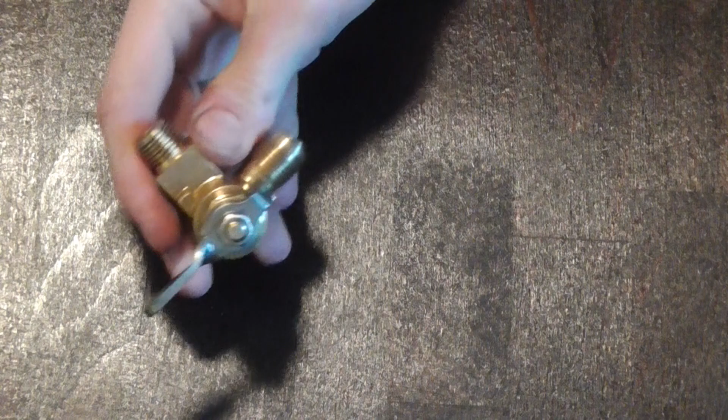The fuel shutoff valve on this thing is leaking again. Here, come inside, I'll show you the problem. So, this is what the gas shutoff valve on the Ford Model A looks like. It's a straight 90-degree on or off type of deal. And let me show you how it looks inside.

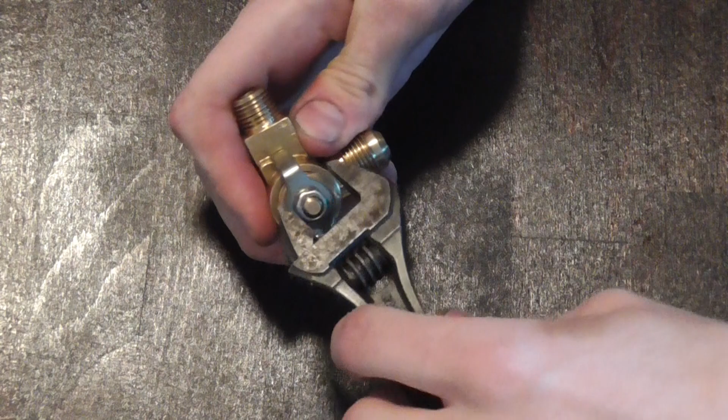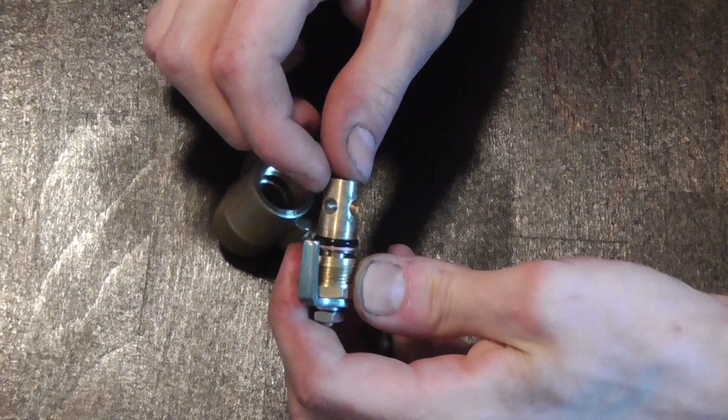Then you can see that there is a tapered plug in this housing, and it has two holes drilled into it at a 90-degree angle. Now when the valve is switched off, like this, then there is nowhere for the gasoline to go because there is no hole in the top, and therefore it seals off. Switch it on, and the hole right here diverts the gasoline over to this hole right here, and therefore permits it to go to the engine, to the float bowl and the carburetor.

The problem with this design is there is no real way to make sure it's properly seated. So therefore all you're relying on is that little bit of friction on the O-ring to keep this taper piece in its taper seat. And any bit of debris or dirt that comes from the tank and manages to get in between the seat will score it up, and you may not even be able to see it, but there are a couple of very, very fine grooves worn into this thing, and that is already enough to make this thing leak.

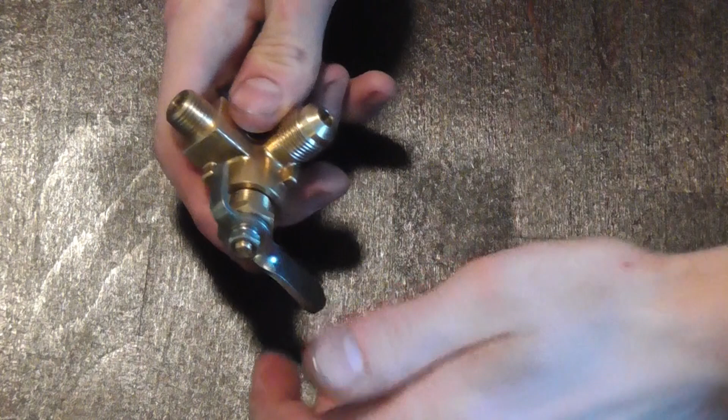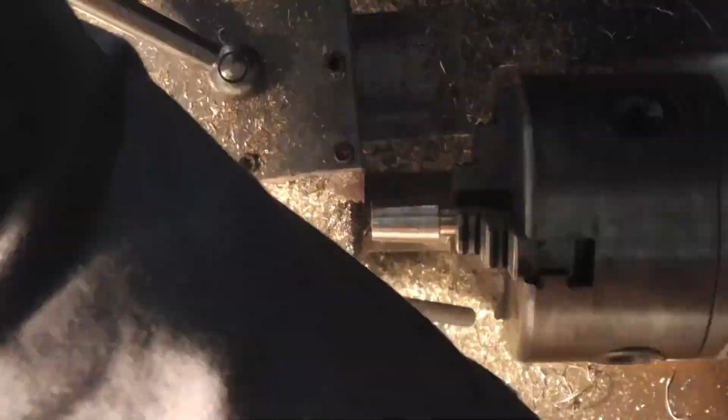So I've taken this thing off the car the first time and tried to lap the seat. Didn't work because that one was quite badly worn. Bought a new one, which is this here. It lasted about 3 weeks or so, and it started leaking as well. And then, last not least, I thought, alright, maybe I can try and machine one of these pieces myself. Put a great deal of effort into this. It didn't work again. So, you may understand that I was quite fed up with this thing at that point. And I threw it in the garbage.

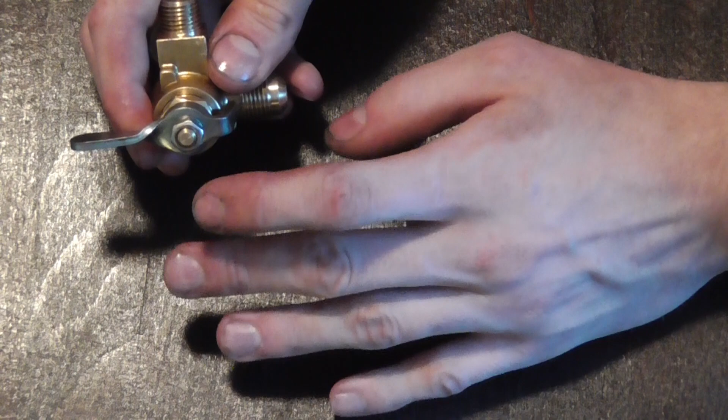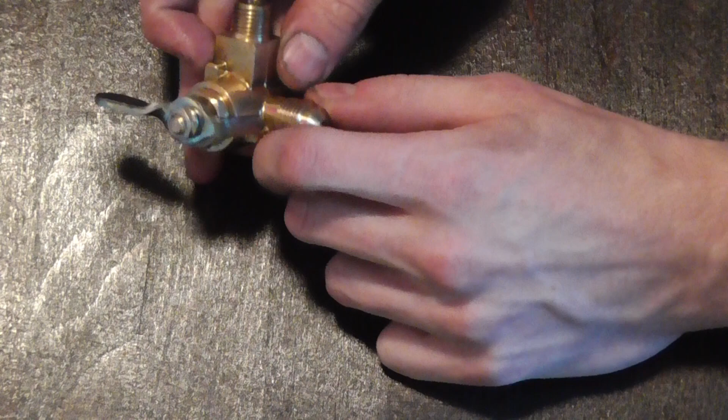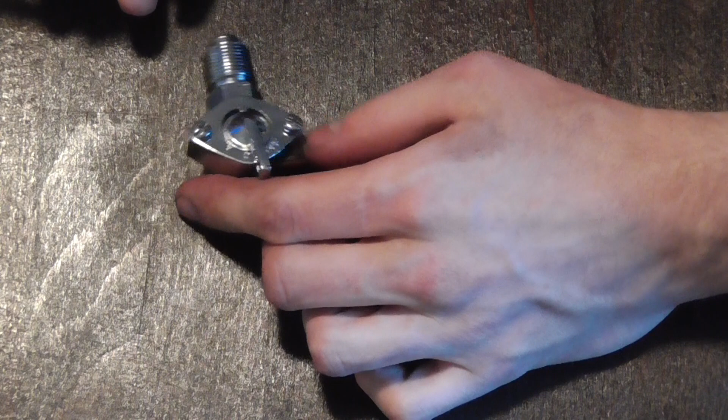For in between, what I did after each overnight stop, I would drain the sediment bulb and plug up the gas line. Not really something that you want to be doing for the rest of your life. So I went online, tried to figure out what these threads were, and looked for a shutoff valve arrangement which could be adapted for my purposes. I found this, which said to have the same thread on here, and the pitch is the same, alright, but I think you can see quite clearly that those aren't the same diameter. That's because this is American thread, this is British thread, they don't cooperate with each other, and metric isn't even in the game here. And trying to find something with that combination is basically impossible.

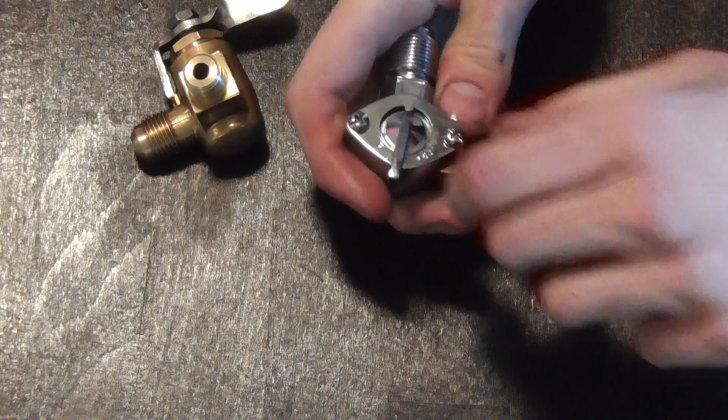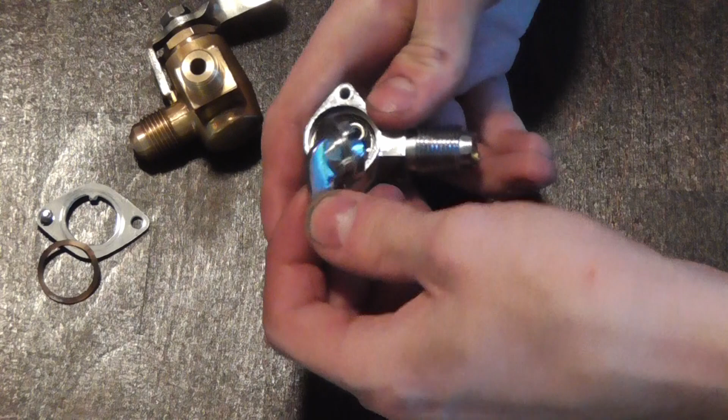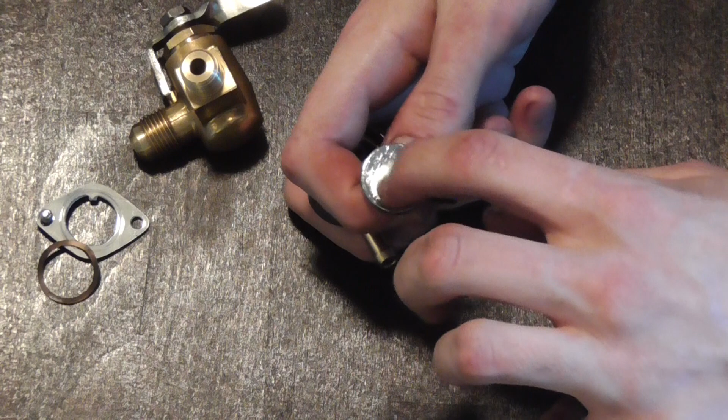This one has quite a neat design as well, it even has a reserve function. Let me take this one apart for you too. There is a spring washer in here which will keep this thing tight against the seat, and why I like this is because it doesn't rely on a metal-to-metal fit. Instead there is a rubber gasket in here, and then, where the 90-degree holes were in this one, a 90-degree kind of slot cut into it, which is then going to respectively open or close the connection between two of these holes. So again, wrong thread, nothing I could do about it.

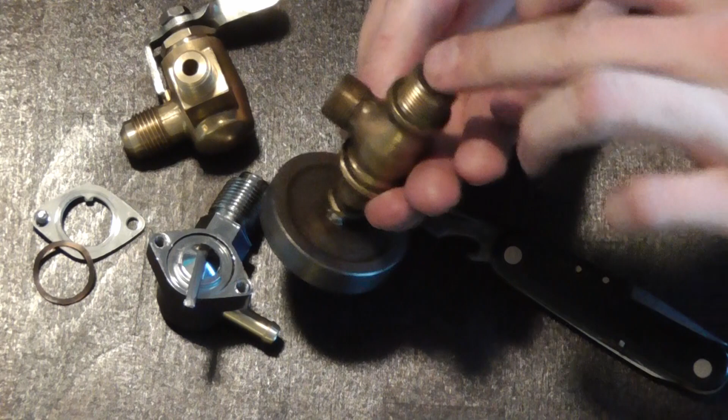So I took a look in my drawer of many things and found yet another valve. This one has the right thread over here. Problem is it would have space problems because this would need to screw in through the tank and this here would be in the way. It's too long over here, then there isn't the right receptacle for the gas line over here, and of course it's the wrong thread on top, so it's not really usable. But the reason why I show it to you anyways is because I kinda like the concept of this thing. Here, let me take this one apart as well. And now you can see that the basic valve body is rather simple.

It's the elbow piece here, and then down in there you may be able to see a flat seat. And all this thing does is have this disc be screwed tightly against said seat. Rather neat idea. Only problem is that the amount of seating surface is limited, and well, any piece of debris will get pressed straight into there, and there is actually a bit of damage on this seat as well. So I wouldn't want to adopt this.

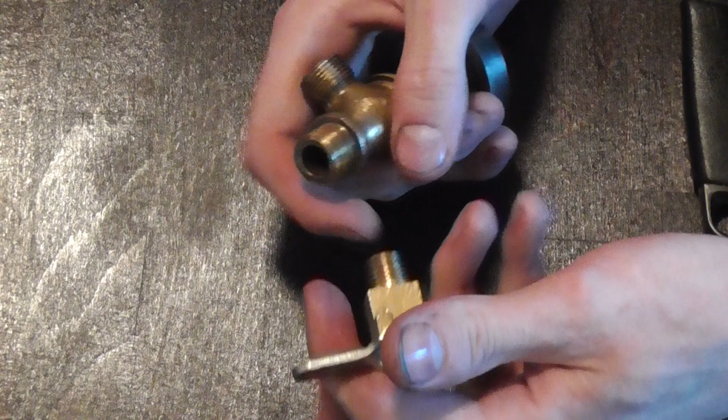However, I took it as sort of an inspiration, if you will, for my own design. I know it may sound stupid to you, but if you ask me, it is simpler to modify the existing gas valve rather than taking one with the proper principle and adapting the threads. Because this is a tapered thread, this here has some weird seating surfaces over here, and those are both UNC or UNF threads. I don't have the taps, I don't have the dies.

So what I've decided is make this into this. And the way I plan to do it is face this side here flush, drill and tap a hole through here, and solder a piece onto the side here, which we can then use to put all the sealing material into here, graphited yarn to keep gasoline from leaking out this way, and of course the valve needle seat and whatnot. And that's the next part.

I'm not going to go for a flat sealing surface, I'm going to go for a tapered seat, which is exactly what they did in my gasoline blowtorches, and they work brilliantly. I mean, they're under pressure, and when you shut them down, they hold that pressure for hours and hours on end. So I figure that kind of principle has proven that it works and should be a manageable conversion for this here. What I'll need to do in the first place, of course, is get rid of the taper seat that is already in here and fill it in.

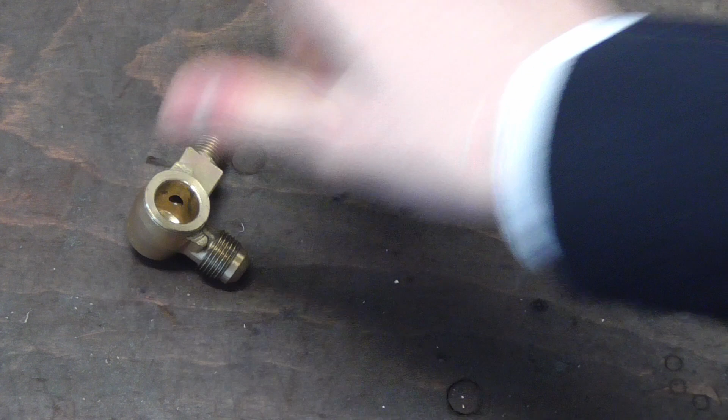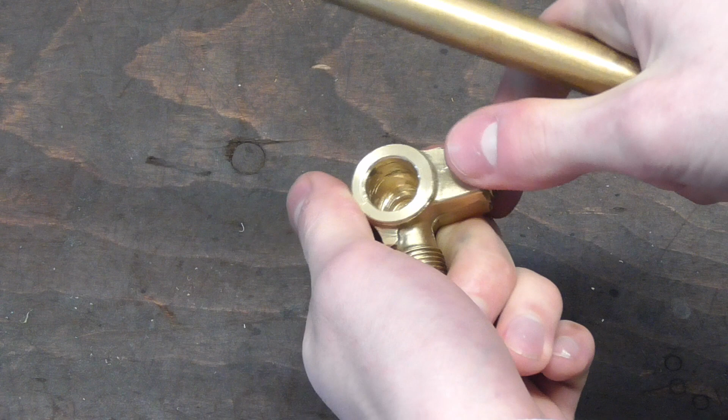Right, so here's the petcock shutoff valve ready to be plugged up with this here piece, and unwittingly I have made this quite the snug fit, which I don't know how, because it's a 15mm drill. This is 15mm brass. Usually a drill will drill oversize, but when you take a look at the wear marks that the piece of round stock here left, then it is quite clear that the hole I drilled is not round.

So a snug fit might be nice, you'll be thinking, but actually, because I want this to seal all the way around, I will machine this thing here down a little bit, so it's a sliding fit in here, just so that I can be sure that the solder, once I plug this up, will flow everywhere around here and will seal it off nicely, because the last thing I want to have is some small gully or path for the gasoline to leak from this hole to that hole. That just would defy the entire purpose here.

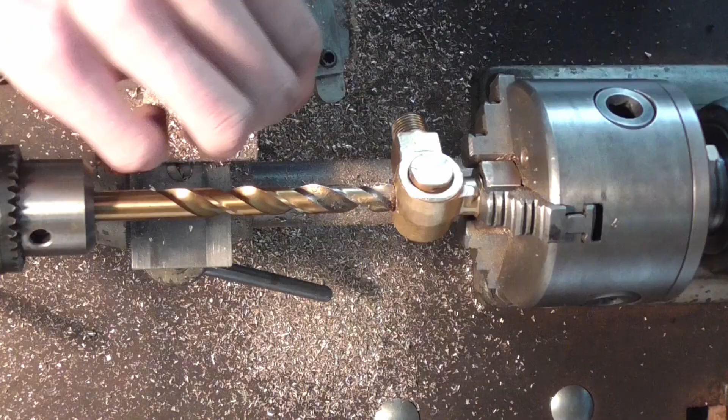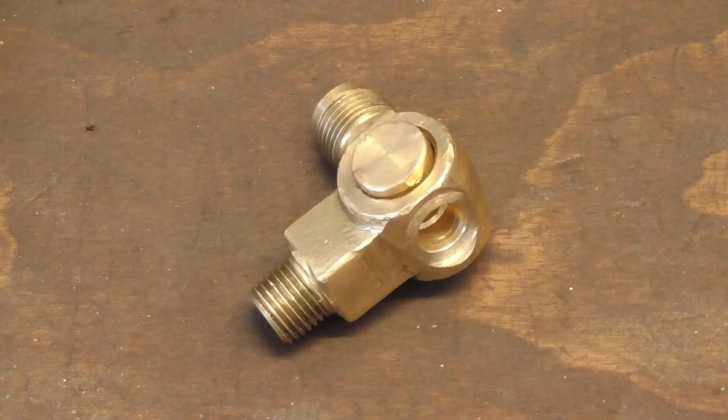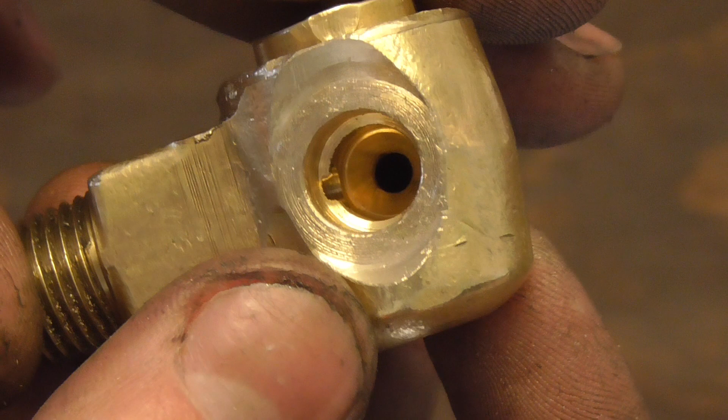Okay, one of the more nerve-wracking parts is done. You can see I have drilled the seat for the needle there, and then there's one larger hole which the insert that we're going to slide and solder into here is going to register in, as well as the plain face here. This in the rear here is a 60-degree seat, which I did with a center drill,

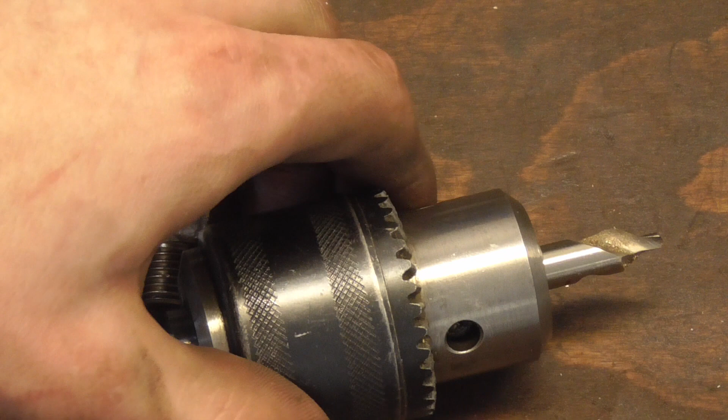and that was quite a tough job to do because there is a through hole, of course, in the middle, and with all the brass and the sharp tool that I had, it wanted to just grab in there, so I had to get a little creative. So for the last few tenths of a millimeter, I used the chuck by hand, because with the backlash in my tailstock, the tool would just grab into there and try to pull a chip bigger than the depth I wanted to do.

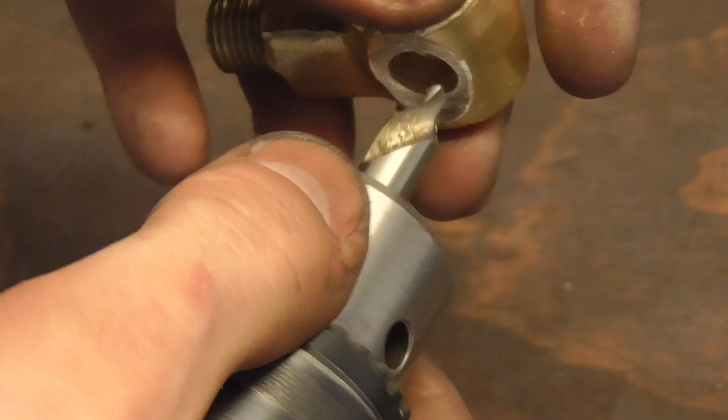So what I did was put this center drill in here so that the depth of the hole is limited by the jaws. Give it a couple of turns, loosen the drill, advance it a few tenths, do the same thing again, and I got rid of most of the chatter marks in here. You can still see a bit of this helical striping.

I hope I can get rid of that by making myself a steel lap and using some lapping compound to smooth that out. However, I will do that after soldering all this stuff together, because most likely the flux and the heat will ruin the surface on here a little bit.

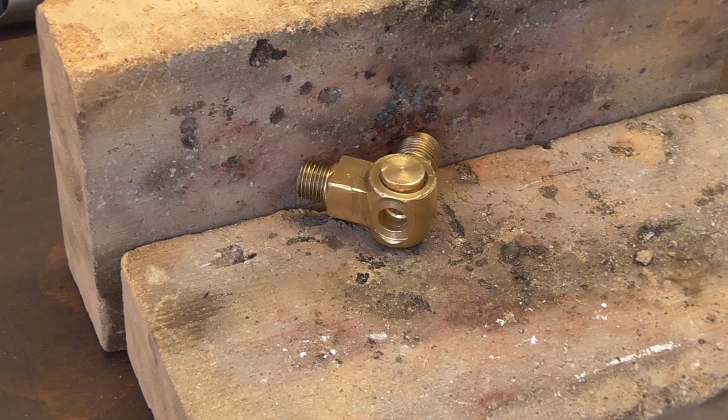Now comes the next nerve-wracking part, which is soldering the thing together. I was still hesitant about silver soldering it because it's quite a large part and I'm a little afraid the heat of the torch won't be enough. But on the other hand, it's just going to make me feel safer. So yeah, I'm going to try it. I have a second torch handy just in case the heat shouldn't suffice.

And step one is going to be have it sit like this and seal off the piece that we pressed in here first, and then I'm going to flip it up like this and set the insert into here and solder that one into place. Wish me luck!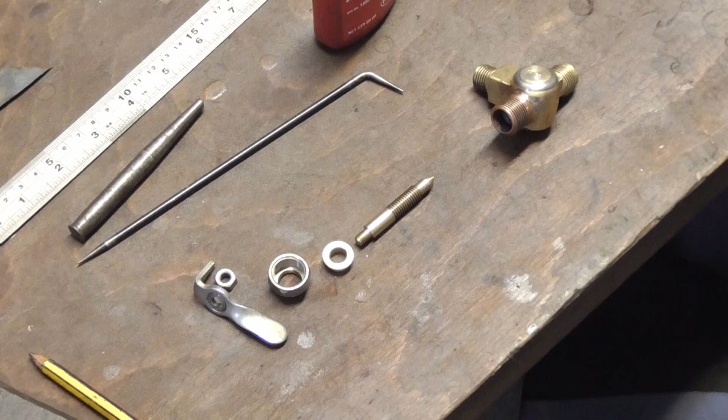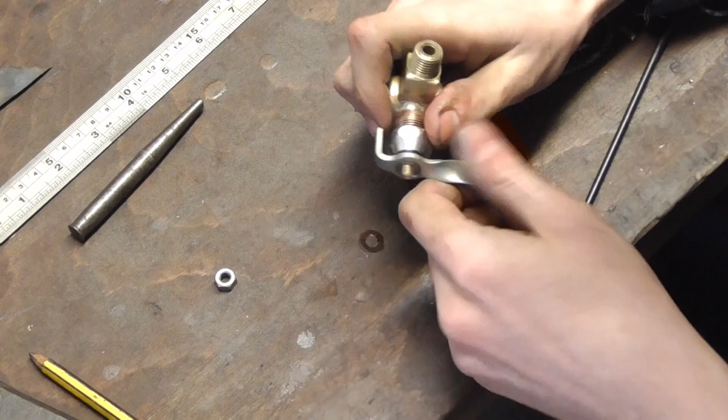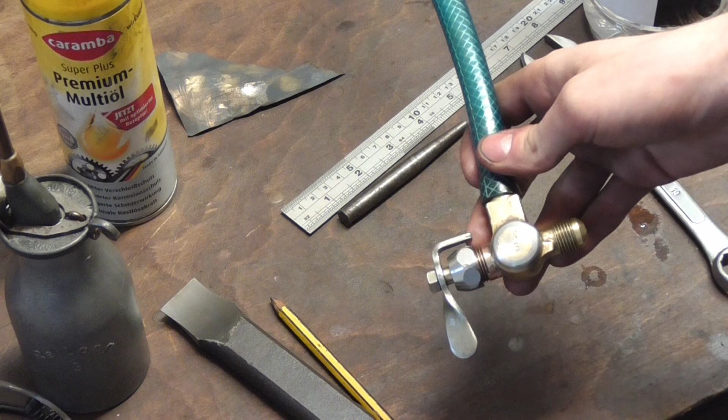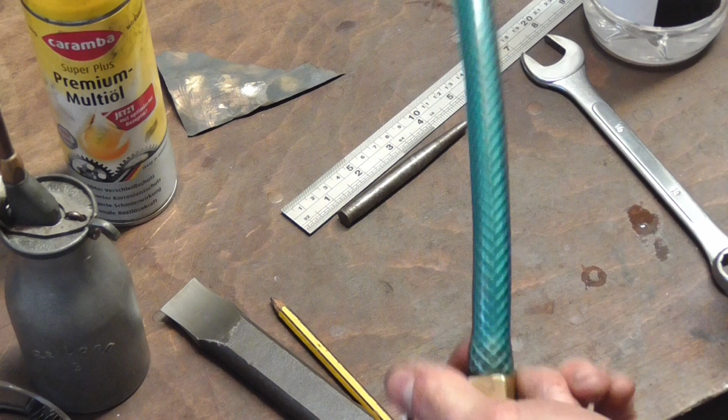Okay, now it is assembled, and blowing into it while shutting it doesn't seem to uncover any big leaks. Now I want to know how it's going to perform under pressure, because I'm not going to put petrol in here, it just gives me headaches. So the thinnest liquid we have in the household is mineral spirits. I'm going to put that into this pipe and then hook the compressor up to the end of it and let it sit. And after, shall we say 10-15 minutes or so, I will see if anything has run out of here. And if so, it's going to get discarded. That's just how simple it is.

I've opened and closed it a bunch of times just to simulate a little bit of wear, if you will. Because the other drain cock principle took me maybe a month until it started leaking, so I'm hoping I'm simulating that month of driving, once a day maybe, by opening, closing it 30 times, and 60 times would be 2 months. It's not that simple, I know there's dirt from the tank and whatnot, but just so you know, I'm not going to lollygag around. I'm trying to really have something that works and lasts here. So before I give myself the efforts of draining the tank again and making a mess again and just finding out, oh damn, the fucking thing is still leaking.

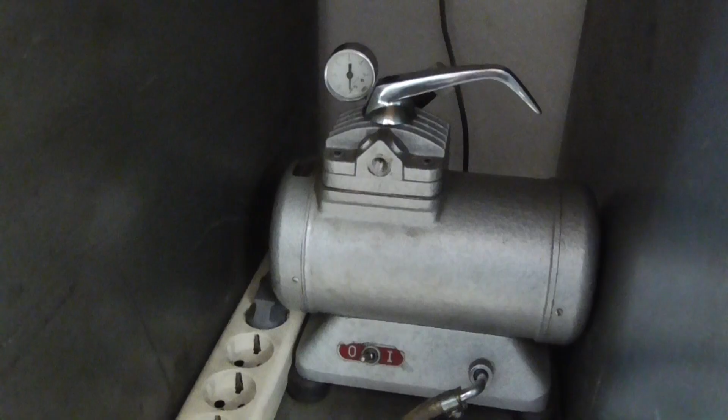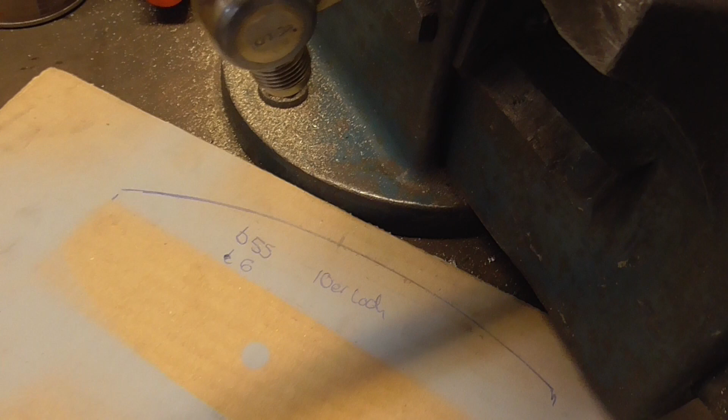Right, so here's the setup. This is the compressor. Line goes along here into the vise and then straight into the drain cock. And a piece of cardboard underneath to catch and amplify every drop, just so I immediately notice if any leakage is going to occur. Now I'm not going to let this run at peak performance. I'm going to limit this to, shall we say 2.5, 3 bars. That's about so many pounds per square inch to all the Americans. And yeah, let it run for a while, see how it does.

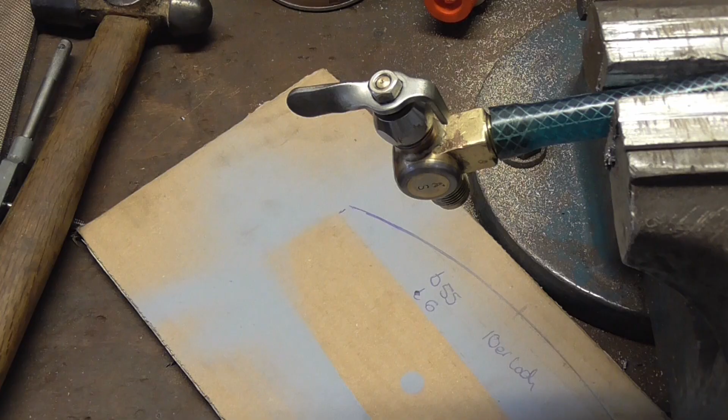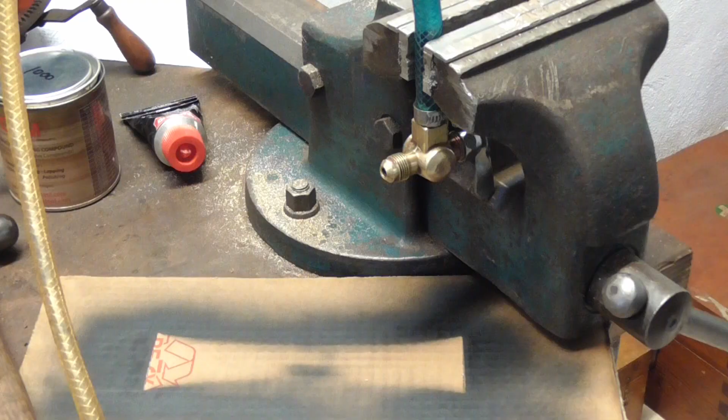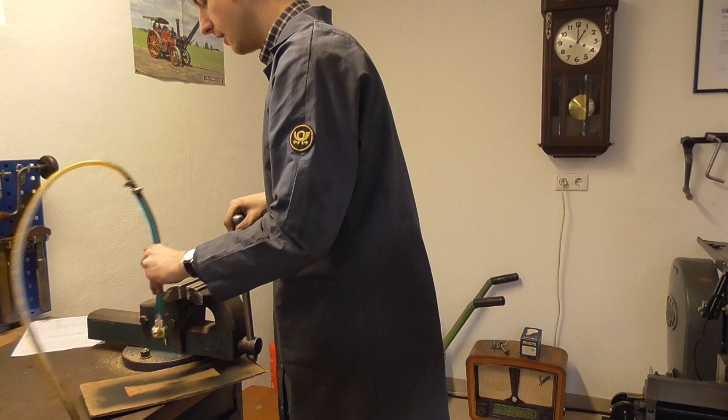My coupling is leaking. And now it's leaking over here, god damn it! Okay, second attempt. Okay, 15 minutes and it's dry as a bone. Also pleased to say from both sides, so from the gland area there's no leakage either. Do you know what? I think I'm going to assemble this thing into the car.

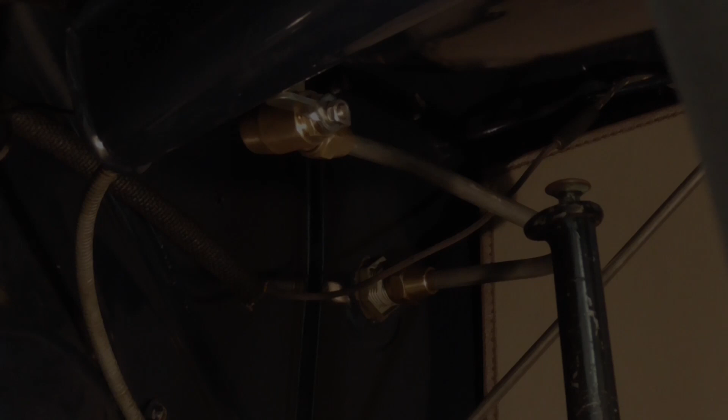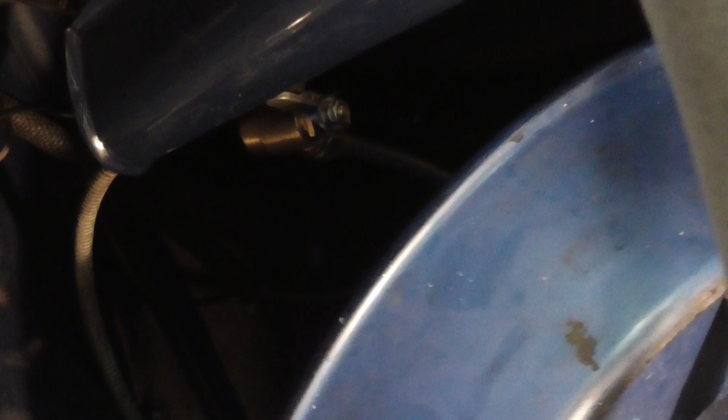Okay, so here's the deal. I am sick and tired of draining the fuel tank. This is one hell of a job, and there is more in the tank than I think will fit into my canister. So I'm going to use a catch tray here. Hurry up! And then there's two possible outcomes. Number one is everything going to go fine. And number two, which is much more likely, is this car will smell like fuel for the rest of my life.

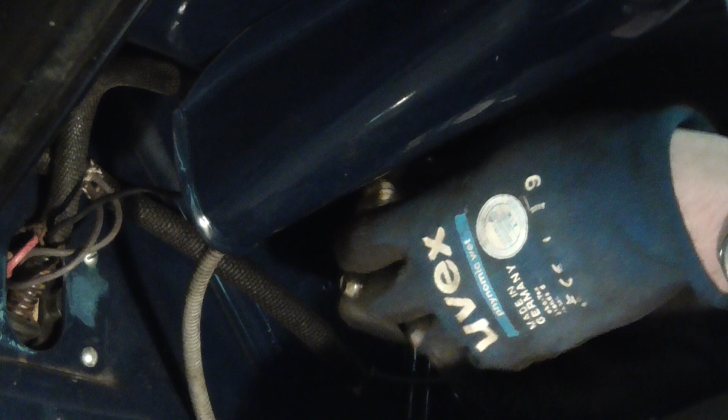It went wrong. Big time. Fuck. So in order to keep this hand lever here from interfering up at the top, I had to cut it off. And I did that with an angle grinder, which is a stupid idea, and you should never do that, because, well, petrol's right next to it, and sparks and so on, so I didn't film it.

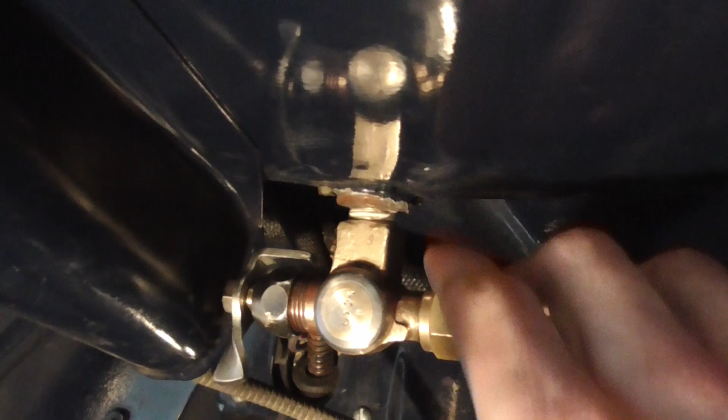In the long run, I'm probably going to make myself a hand wheel here. For now, I'm going to leave it, just to not have to be making extra effort, only to find out that this thing is going to leak sometime soon as well. For now, this is okay.

It'll work. So I emptied the sediment glass here and had it sit overnight with the drain cock shut. Trust me, I did. Whom would I be fooling but myself here? Now we're going to open it up and see if it has the amount of flow that we need. Well, that's looking pretty good. So now we'll need to go for a run, see if it can also sustain that amount of flow rate for high speeds.